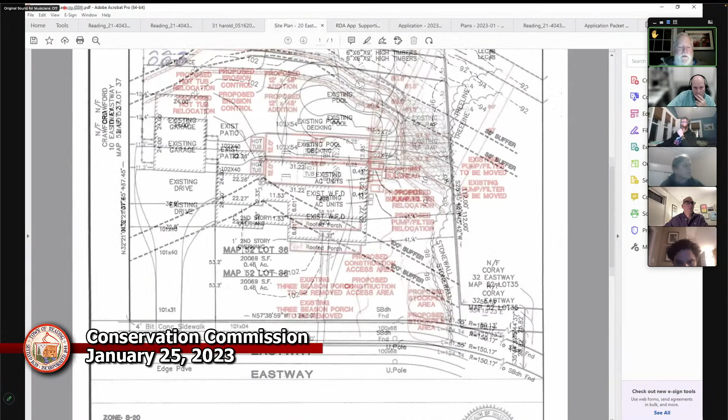One thing I will note is that we did notice there's new boundary stones for the conservation restriction. There were two of them that I can remember seeing that were quite visible. We also noted that there was lots of yard waste, a plastic pot, a dog fence or something like that back there. So from my perspective, before we take questions from the commission, there is a lean. It doesn't look like there's an imminent danger of falling. But at this point, I'll be quiet for a while and let the commission ask questions.

Anybody else on the commission have comments, questions? It was a while ago, so it's been a while since we saw them. Andrew?

Excuse me, yeah, I'll just agree with what Brian said. We visited on January 8th, there's no snow on the ground. I'm just looking at my pictures on my phone. Obviously you can see from the picture there is a significant lean, but these are oaks, so they've been there for a while. Didn't notice anything from where we were. I couldn't stand there and get a good look at the roots to see if there's any signs of uprooting. But the trees looked healthy, and these aren't the type of trees that tend to fall. I mean, these are oak trees, sorry, they don't tend to fall very easily.

So, Mike, if I have a question: how long have you lived in the home, and when do concerns start to raise about fearing these trees might fall because they've been there for a long time? Yes, I'll be living in this property for 3 years, and I believe the previous owner trimmed the trees because you could see on top they were trimmed already. So I don't know if I should go that route, or if it's always good to go through the conservation commission to have a second opinion, because I really don't want any danger to my property. That's my...

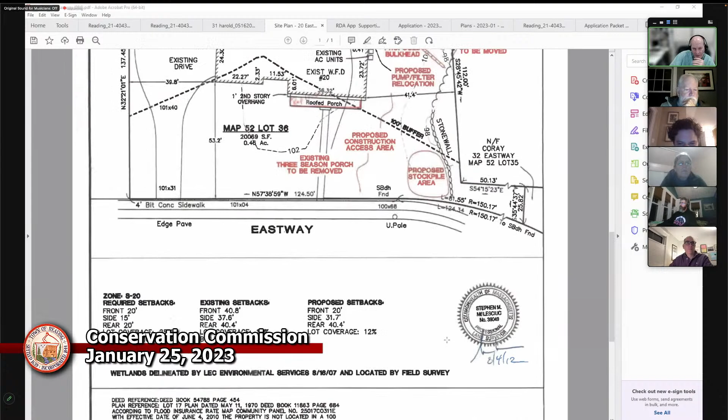And when we were out there, we saw these markers that show the border of the conservation restriction. And that does not seem to show up on this plot plan. Chuck, do you know anything about where the edge of the conservation restriction is? So this is from 2012, this plan. And yeah, so this is the edge of the conservation land right here.

Hopefully you can see my cursor. I mean, right here, the property line. It may go over in this area a little bit, but I don't think it comes down to this other edge. We're having it surveyed at the moment, but my guess is it comes in this way.

If I can jump in, we saw 2 markers in particular. They were along the back straight line edge, but towards the middle or even left of middle. There were 2 clear granite boundary markers with the label of conservation restriction on them. So I was picturing that it was straight out from here that the conservation restriction was.

Well, there's, you're talking about this area over here. And is that where you saw it? Let me get my cursor to where it is. Hold on a second. It looked to us like the conservation markers were pretty much at the fence line and not what it is, 5 or 6 feet back. That was the puzzling part.

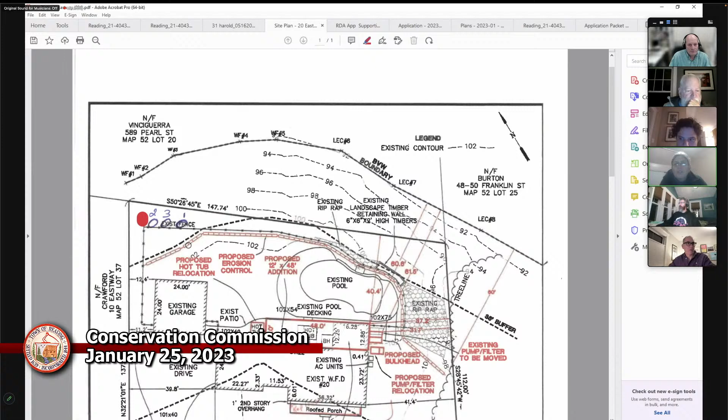Okay. Can we go back to the picture of the trees where we can see them leaning with all their branches over the property?

Yeah, and I also just don't think that the crowns are very heavy, right? Like there's some large canopy trees that are leaning that might have another leader or second leader, right? That's not helping, but I mean they don't look like they're very heavy. You know, I know there's leaves in the trees, but they're long, but they're not very heavy looking to me.

So what does that imply, Carl? That they would be less likely to fall, or that they're not very healthy? When you say they're not very heavy, what does that mean? I think it's just that maybe they're looking for some sunlight. I think they look healthy to me. I think heavy just means that sometimes if it was multi-leader or another big branch coming off or something, that would be weighing it down, but they don't look like that's happening, which is better for the tree.

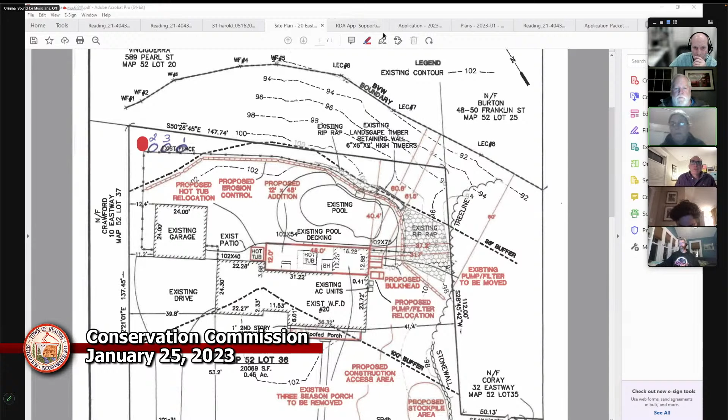Okay, so Mr. Arojo, would you contact the conservation administrator when you are ready to have the trees removed, and also have him and Brian come out to look at the locations of the replacement trees.

And look at the leaf litter and see what needs to be done about the litter and the debris. Okay, we'll do. Okay, we're done with that one.

Ready to move on? The next hearing is 295 Main Street. We are opening the public hearing on a request for determination of applicability filed by Danny Cerqueras Construction LLC under the Massachusetts Wetland Protection Act, MGL Chapter 131, Section 40, and/or the Reading Wetland Protection Bylaw, Section 7.1.

The applicant proposes to replace the existing decking and railings on the 16 exterior decks. The existing decking support framing will remain, and all of the decks will be accessed by using a lift parked on the paved parking lot. Portions of the work are within the buffer zone to a bordering vegetated wetland and riverfront area.

The application and plans can be viewed during regular business hours at the Town Hall Conservation Office and on the Conservation Division page under Current Project, Assessor's Map 12, Lot 44, RCC file number 2023-03.

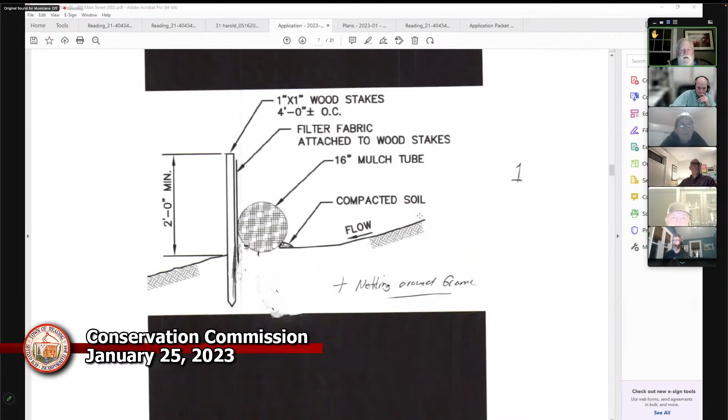I did propose. I'm just noting that we're talking about preventing debris from workers falling, and yet there's this dumpster area to the back right, which is every bit as close. So if you could move that across the parking lot, so it's essentially in the back left, I'd be happier that it's that much further away from Walkers Brook.

Yeah, that shouldn't be an issue. Let me see... oh yeah, right here.

Okay, Brian, just hold on a second. Kate, are you talking about an existing dumpster that gets trash from the building residents? Yes. Actually, the person we're talking to is not the building owner, it's the construction person for this project. Well, that explains that. Okay, I was a little confused there.

Okay, with that, Martha, back to you. Yeah, I just have a question about how you get the planking and the railings from the 4th floor and the 3rd floor down to the ground when you're doing this project.

We'll bring it all down in the lift. So the decking that's there now, they're 8-foot pieces. We'll basically cut them in halves with the Skil saw, and then just put them in the lift and bring them down as much as we can at a time.

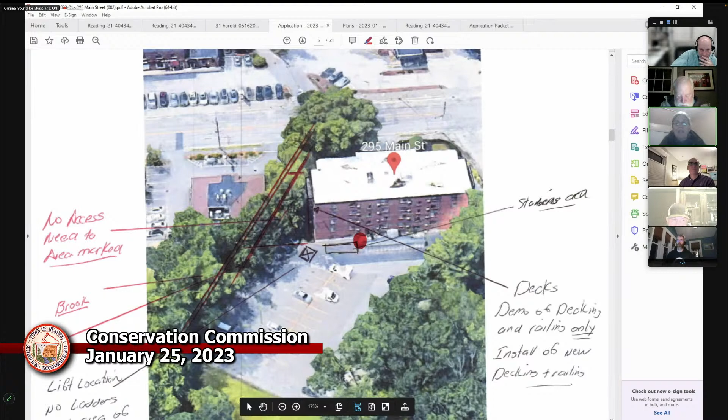And are there any people in the general public who are here at this hearing who would like to have input on this today? If so, please use the reaction button and raise your hand. Okay, I don't see any general public. Is there any further discussion needed on this proposal?

Not seeing any, can I have a motion? This is again an RDA, so we want to close the hearing and then we're looking for a negative determination if they're going to do this project.

This is Andy, I'll make a motion to close the public hearing for 295 Main Street. This is Brian, second, I'll second that. Okay, that was seconded by Brian. Let's vote: Brian Bowe in favor, Carl Sacconi in favor, John Sullivan in favor, Andrew Driven in favor, Martha Moore in favor.

Okay, can we have a motion? I saw Brian. Chuck's finger go up, did you want to comment, Chuck? I didn't hear you, Andy, what did you say? I saw Chuck, you wanted to say something earlier. Did you want to add something before we continue?

So I just want to make sure that you're not approving the wetland delineation. So just add in, positive 2B.

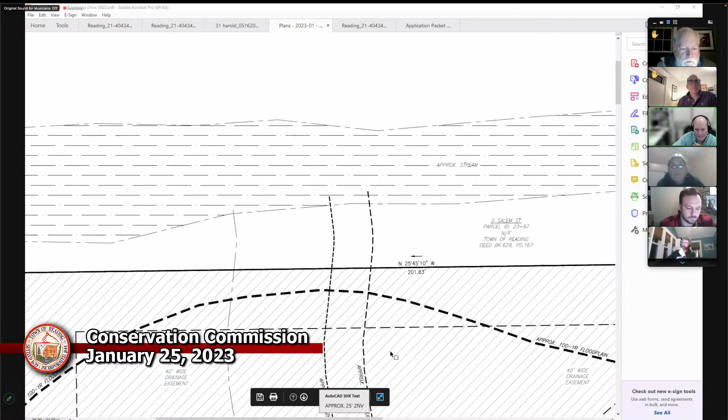So existing 7.5%, proposed 7.7%. Okay, which is considerably under the maximum of 25%.

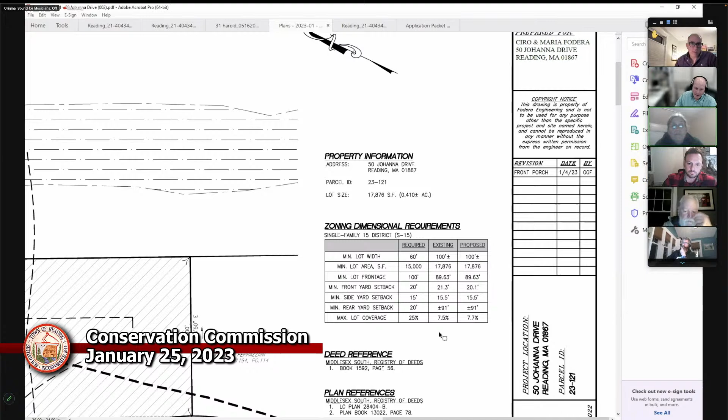Right, but that's kind of like an allowance for zoning, where we would be interested in the 10% within the first 100 feet of the riverfront. Okay, and it's still under, so 10—that's what, Andy, I didn't want to take your thunder, sorry. I just wanted to show all that, kind of knowing that you were going to be talking next.

Okay, Andrew. I think Brian has his hand—oh, did you take your hand down, Brian? Yeah, the next thing I was going to talk about was the square footage, so Chuck beat me to it.

Yeah, I didn't really need to see much more in my quick analysis. It looked like it would be a positive determination, I didn't need to spend much more time than my quick drive-by. I think we are owed a little bit more information about what's happening and how we're going to prevent the debris from going into the river, and then just addressing these larger concerns—does it meet the riverfront standards and all that jazz?

So the riverfront standards do allow alteration of up to 5,000 square feet on a parcel, and this is well under that for sure. No, the riverfront standards for redevelopment allow up to 10% of the site. So you have about 1,800 square feet, which is 10%. It's 10% or 5,000 square feet, whichever is larger.

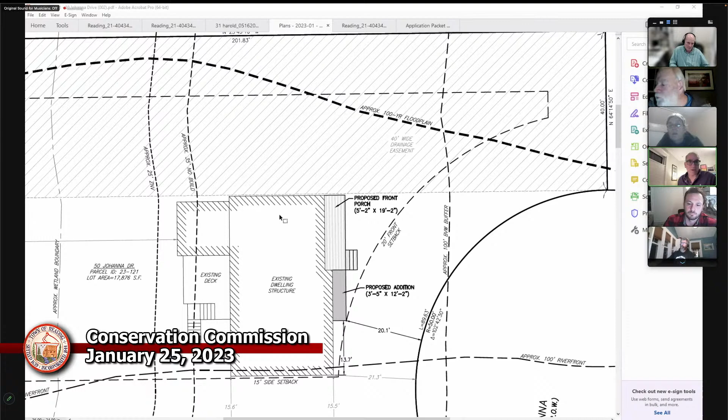And it's up to other folks on the commission. From my point of view, it seems like a positive determination. It would just be a notice of intent, but I know that's a bunch of paperwork and other things. I'm not saying no to the project, I just think you should go through that process, but I can pick it up where you left off, or you can do it, Andy. I think it's important to understand that this is a riverfront.

The existing impervious area has to be calculated into that 10%, or 5,000 square feet. So I was wondering, what is the total amount of existing impervious square footage? Giovanni, do you have that? I can run that calculation real quick.

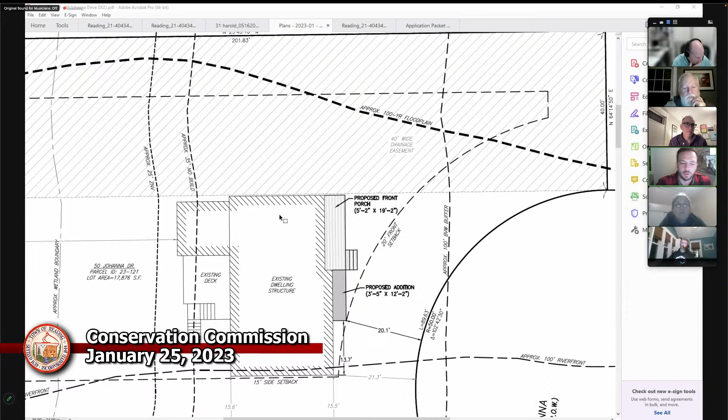I think we were at 7.5% of the property. The property is 17,876 times 0.075 — this is without the addition — so it's approximately 1,300, call it 1,340. And then adding 42 square feet for the addition, we're still very well under the 5,000 square foot mark.

And it looked like the driveway to the right of the building is not paved — is that correct? Just to make sure we stay on topic, sorry Martha, but the 5,000 square feet, which is what Andy was trying to say, does not exist in the redevelopment standard. You have to meet the 10%. You don't get that alteration.

I believe that's what he's saying, and I'm looking at the regulations now to make sure that's correct. So anything over 10% — with this project and this addition, if you're over 10% of the riverfront, you need to mitigate or restore to move forward. That's why we were interested in the numbers and whether you met that standard or not. That's right, but if he's saying 1,400 square feet, he's still under the 10%. So, okay.

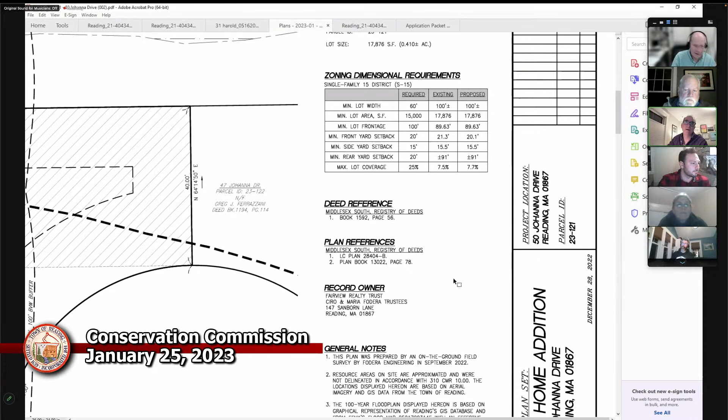Can I ask why this was submitted as an RDA and not an NOI? Because it's determined — it's a 42 square foot addition on an existing house, on top of existing lawn, already lawn. I think it's appropriate.

I do think that you could ask for, if the numbers don't work out, some mitigation or restoration. And if the numbers work out, then it can be approved. I don't agree that we have to have a notice of intent to do that, but you guys can make your own decision. So Giovanni, did you get an answer on the driveway?

I'm getting approximate values right now. It looks like the driveway is approximately 1,200 square feet, using online area maps. So the driveway is about 1,200 square feet on top of the 1,400-ish for the house itself. So then if I'm looking at that right, that puts you over the 10%, does it not?

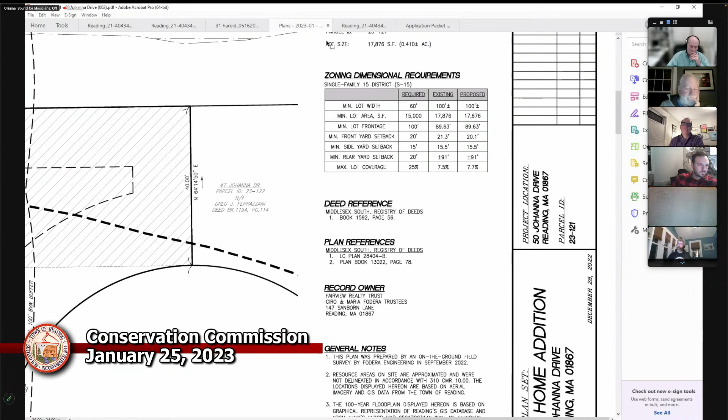We have to make the driveway impervious. Is there anybody who's been trying to talk who is one of the homeowners? Yes, my name is Ciro Fodera. And what Giovanni said, you have what, 1,200 square feet on the driveway? How did you come up with that?

So it may be well under 1,200 square feet. Using the GIS markup tools, measure polygon, I came out with 868. Probably conservative, but I don't think it's good enough. And I actually went out into the cul-de-sac area where I probably shouldn't have. Could do it again quickly.

So I'm going to suggest there's a lot of questions here, and we may want to continue this hearing and have the applicant come back with actual numbers after having a chance to look over the regulations and understand them better. But are there other questions members of the commission have that we could propose tonight, so that when the applicant comes back next week they'd also have answers to those?

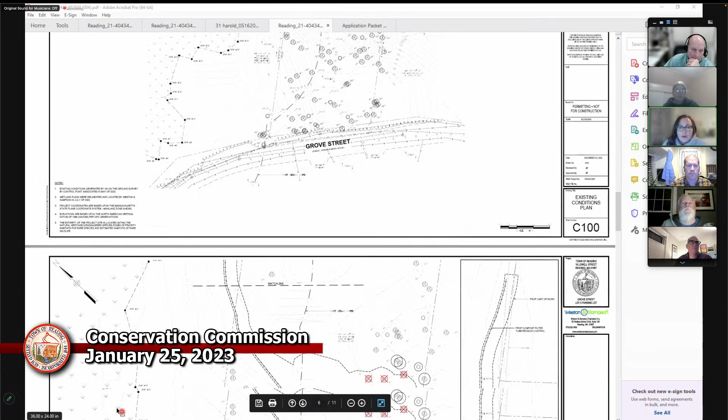So the proposed work will include the construction of a gravel parking lot with 17 parking spaces, including 2 handicap accessible spaces. There are 2 portable toilets proposed just north of the handicap spaces. As Chairwoman Moore mentioned, 25 trees are proposed to be cut down to accommodate this parking lot. 24 of the 25 trees are not located within the buffer zone. You can see on this plan the 100-foot buffer zone just clips the limit of work in the northwestern corner there. The site will be regraded to accommodate this parking lot, as shown on the project plans. A guardrail will be installed along Grove Street to limit any cars from parking along the street and encourage folks to use the parking lot in this area. It extends pretty far in either direction to discourage the use of parking on the street. So during construction, compost filter tubes will be installed between the proposed work area and the nearby bordering vegetated wetland. In addition, a stabilized construction entrance will be installed to prevent any sediment and other material from being tracked out onto the roadway during construction.

So the parking lot has been designed to have very minimal impact to resource areas. It only clips the 100-foot buffer zone, and it's a walking path, as you can see on this plan right here. All disturbed areas outside of the parking lot, but within the limit of work, will be restored with loam and seed after construction. The entire site is located within natural heritage priority habitat of rare species and estimated habitat of rare wildlife. We submitted a MESA checklist to Natural Heritage and received a letter today. Chuck, I believe you have a copy of that as well. They proposed a no-take action, but with a few conditions that the project will need to meet. So I will turn it back over to the commission and answer any questions you may have.

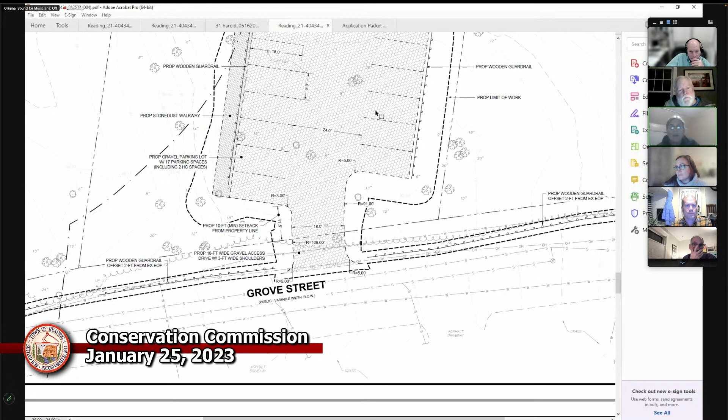And I'm a little concerned about the cut into the hill at the back end. The topo lines for the proposed grades seem to be quite steep. Are they meeting the minimum or maximum slope requirements for grade? So we have a 3-to-1 requirement, and if you exceed that, you just have to propose stabilization material, and the commission has to approve it. So we just have to know that's what the regulations are asking.

Can you show us the picture which has those topo lines on it? Sure. So I believe we're proposing 2-to-1 grading, but we have a note stating it will be stabilized with erosion control blanket. Okay, yep, right there, if you just move—yeah. So you're going to staple that into the slope, and then is it seeded? That's correct. Yep, everything outside of the parking lot, but within the limit of work, will be loamed and seeded.

Did you call out your seed mix?

Does it make sense to have a seed mix? Are we talking about grass in this area, or the edge of the forest? Yeah, we left it generic. Usually the way we handle that with these projects is when they get into construction, we have a set of specifications that gets into the nitty-gritty of the seed mix. We have different ones we select from depending on the objective, so we'd select a mix proper for stabilizing a slope of this nature.

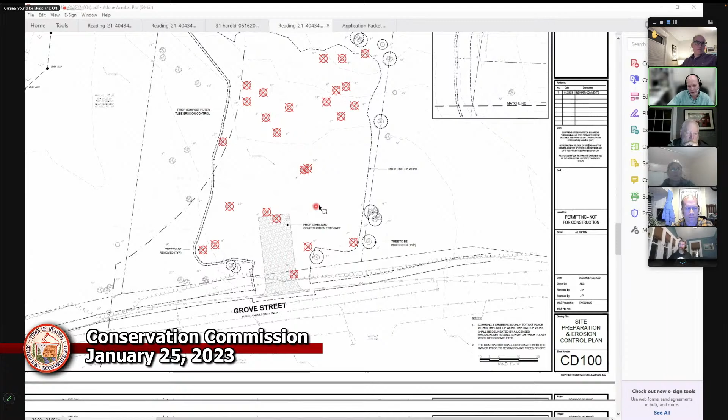The other thing I wanted to mention is that there is one tree being removed in this area, and I think for this tree you would meet our tree policy. The commission can talk about that, but they can have the replacement anywhere they want—it can be within the buffer zone, which is desired, but it could also be along the bank here. I think planting in this area is reasonable, and if we brought it to the town manager and made a request, that likely would be well received, even though it's outside the conservation's jurisdiction. So that's all I wanted to say.

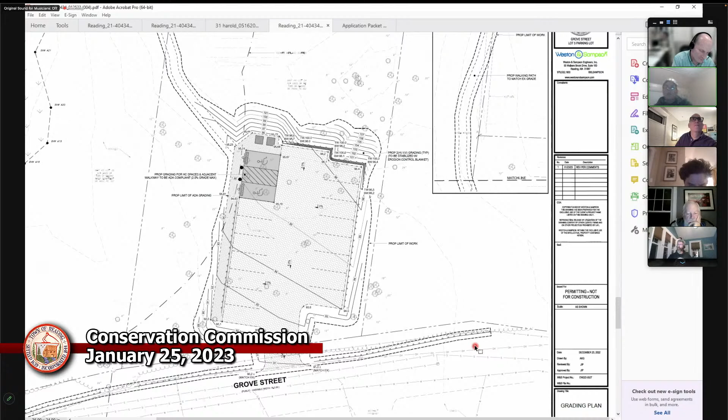Chuck, can you show the part of the plans that show what the guardrail looks like? Well, this is the guardrail. Oh yeah, sorry, but there's an image of what the guardrail would be built like. Here we go, I think I just need to move this over. This is proposed as a wooden guardrail.

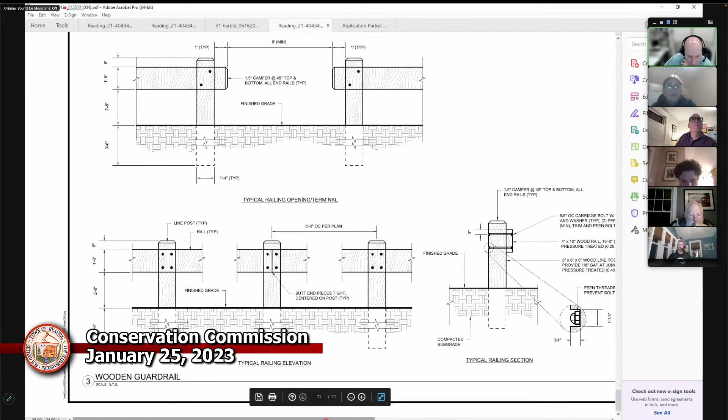Let's see what it says here. 4x10, kind of like railing going across the post. The posts are 8x8s. Is that what you said, James? Yeah, 8x8 posts, 8x8x6. Everything's bolted together. Yeah, it's a pretty substantial but wood guardrail.

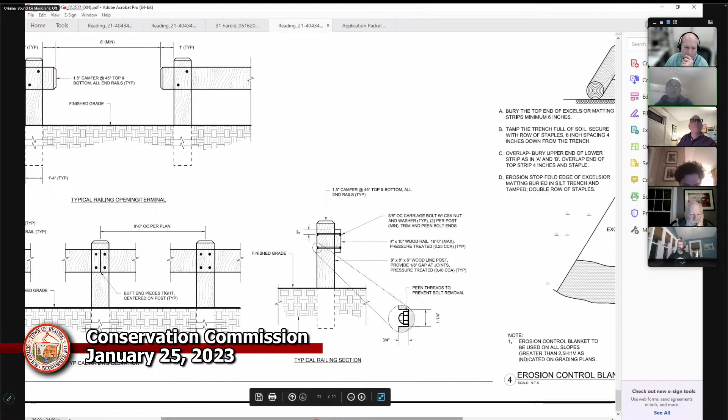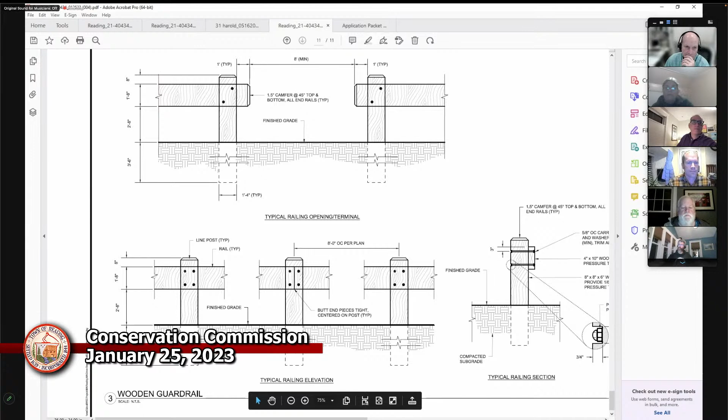I think we saw plans at the previous meeting of what the house construction on lot 4 would look like and where it would be located, when we were voting about the conservation restriction. So that might be available on the conservation website for Mr. Freeman if he wanted to look at where that house is proposed to be built. Thank you, I will check that out. It's also probably on YouTube.

Okay, any other questions or comments on this project?

All right, so where do we want to go from here? Let's work towards wrapping this one up. I think one thing we heard was we want to do something about the tree that's being cut down that's within the 100-foot buffer zone, and possibly putting shrubs on the hillside to mitigate for that loss of that tree.

Are there any other conditions we would want included in a negative determination for this project? So in lieu of the tree, you would ask for a tree or two shrubs, proposing to put them on the hillside just in back of the parking lot. And from what I gathered, you're going to make a request through me to the town manager for some additional plantings of shrubs. I was wondering what you're looking for—would you just like to receive a proposal, or just know that the request went there?

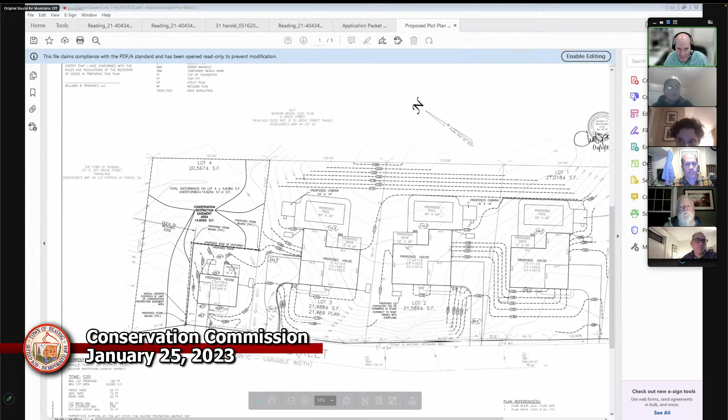I would say that that guardrail looks pretty accurate for that length. I didn't see it taking a corner, so I think we should be okay—protecting the conservation restriction with a guardrail and not going across in front of the driveway. Right, maybe that's what is being proposed.

Okay, thank you. All right, can we close this hearing? This is Brian, I make a motion to close the hearing on lot 5 Grove Street. Second. Brian Bowe in favor. Carl Ciccone in favor. John Sullivan in favor. Andrew Gibbon in favor. Martha Moore in favor.

Can we talk about conditions now, just before you make the issue? Some of the conditions you may want on the site, we already have. If we're talking about shrubs, they're going to be 5-gallon pots. We talked about the guardrail, and we're going to require 1 tree or 2 shrubs at the back of the parking area. And we're going to make a request for an additional amount that I'm going to have to create with Carl Ciccone and Martha Moore to present to the town manager.

Okay, so they can see the plan. Any other conditions on top of that? I would add, make sure the street's swept each day at the end of the job—I know we have a construction entrance. It's only a small part in the 100-foot buffer zone. I would imagine no stockpiling would be done in that area; there wouldn't be any need for it. And the guardrail will not be installed until the parking lot is complete and operational.

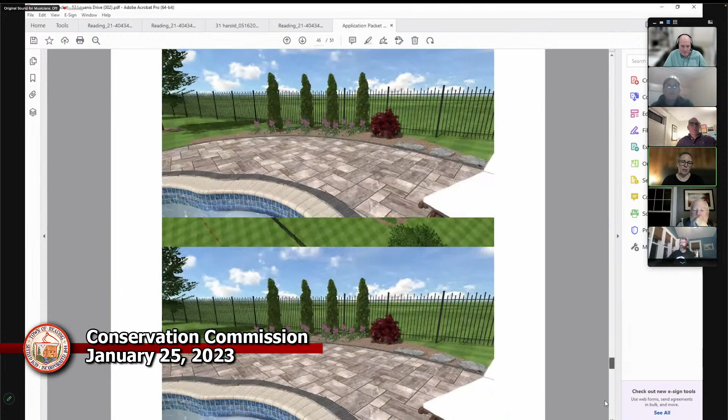Kristen Farr with Hancock Associates, I'm a wetland scientist on the team there. With me tonight is Jason Morey of Brookwood Landscape and Stonework to answer any questions about construction methods and things. But as you stated, Martha, this is a buffer zone project. It's an existing single family house where they want to install an in-ground pool, patio, replace the deck, expand the deck a little bit, have a pool house and putting green, and a safety fence around the property.

So there's no special areas, no natural heritage, no outstanding resource waters, ACECs or anything especially sensitive here. It is a buffer zone project, and under your bylaw we are not touching the 25-foot zone of natural vegetation, nor are we going into the 35-foot no-build zone. We are proposing erosion controls around the site. Any excavated soils would be trucked off-site, so there would be no need to stockpile. Some minor grading is proposed around the pool area, but overall it's a pretty flat site.

I know you guys did a site visit. I couldn't make that the other day in the blizzard, but I hope you could see what you needed to see in order to make a decision. But I am here if there are any other questions. So that's the short presentation.

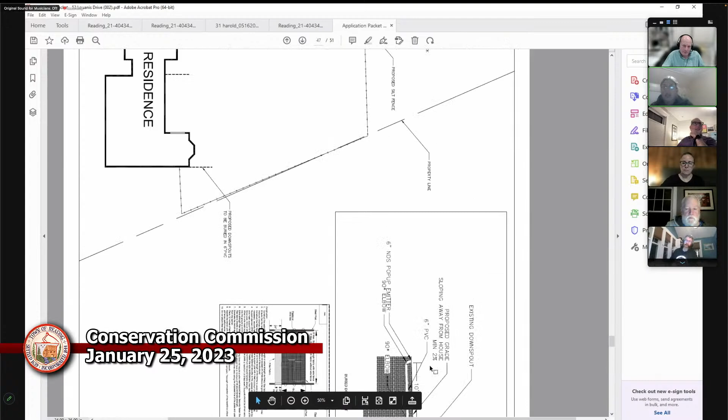Okay, I'm just, as people talk, I'm going to run through the pictures. And I believe there was only one commission member who was able to make the site visit, and Chuck, so maybe you guys could tell us what you were able to determine in the snowstorm?

Yeah, I can give a quick rundown. The lawn was kind of all covered in snow, so we couldn't tell a lot about what was there, other than that the vegetation changed as you get towards the back of the yard, which you can see on some of these pictures. It kind of turns into woods. There's some Phragmites patch back there, but otherwise it should be lawn all the way back until you get to the wooded area. Chuck took a couple of soil samples with the old auger. It was pretty rocky soil, had trouble getting down too far into it, and I don't think there's anything in the soil that suggested the wetland extends farther into the yard than where it's currently marked. We found there were 4 flags, we found them all, and they all seemed reasonable from what we could see while we were out there.

Thank you, John. All right, Chuck, do you have anything else to add to this? No, I agree with the wetland flags, I think they were well placed, I wouldn't move any of them. Have to say we did this in a snowstorm, but they did look good, snow and all. Okay, any members of the commission with questions or comments?

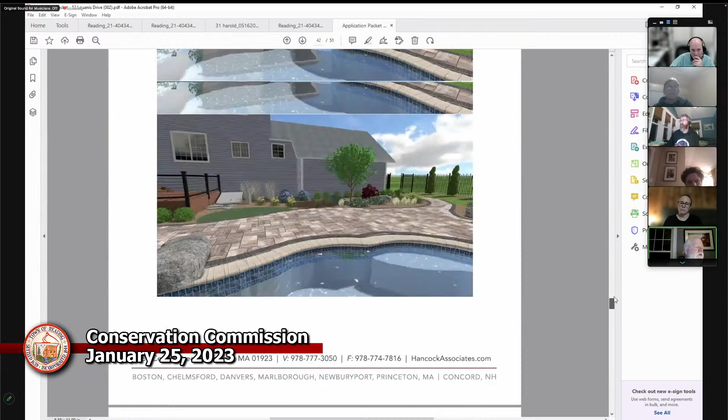Brian asks: So you said that any material will be trucked off-site. Is that every day? Will any be left for any period of time? Jason, is that something you would be able to answer - like how long the pool would take to excavate and how often material would be trucked off?

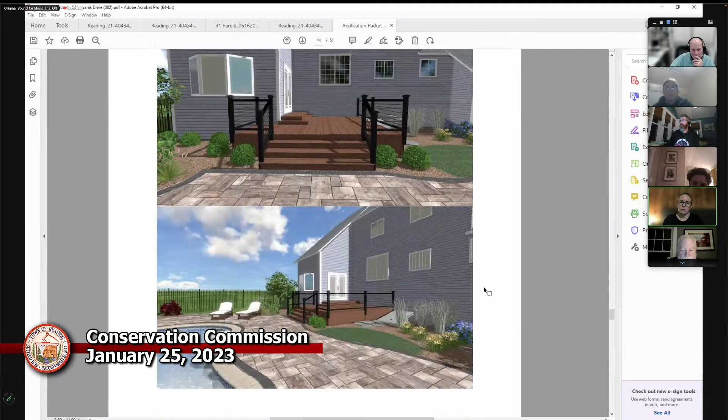Jason, are you still there? I'm here. Can you hear me now? Yes. Good evening everyone, thanks for your time. I'm Jason from Brookwood Landscaping. Typically, projects of this scale would take anywhere from 4 to 6 weeks from start to finish.

In terms of stockpiling material, most of the topsoil and organic matter will get taken out and probably removed right off the site completely. As material is brought in, it's usually structural in nature, so what comes in will eventually stay in place. We generally don't use any of the existing substrate or subsoils as backfill to the pools. This is a fiberglass pool shell, and it's really important that we use processed material, like 1/2 inch or 3/8 crushed stone, clean against the pool shell. So the organic material will come out, and there's no reason for it to stay on site.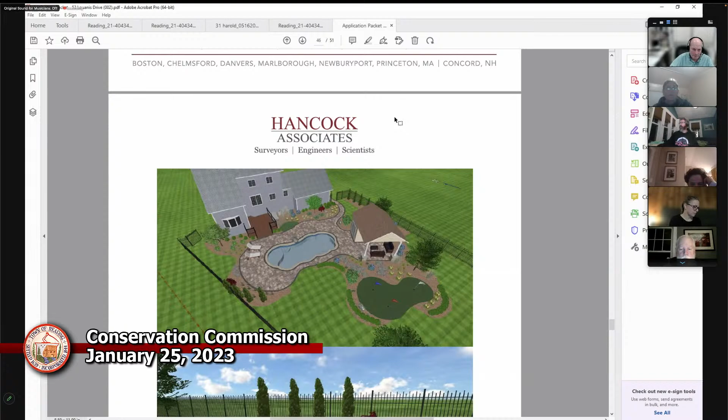I think it would probably just be in our way anyhow. It's kind of tight to access down the property line, I believe on the east side, between the two.

So Jason, if I can interrupt, you said 'probably' a couple of times in your answer - so will it be taken off right away, or will it not? Yes, it'll be taken off right away. Okay, so you won't have anything to worry about eroding even overnight or for a day?

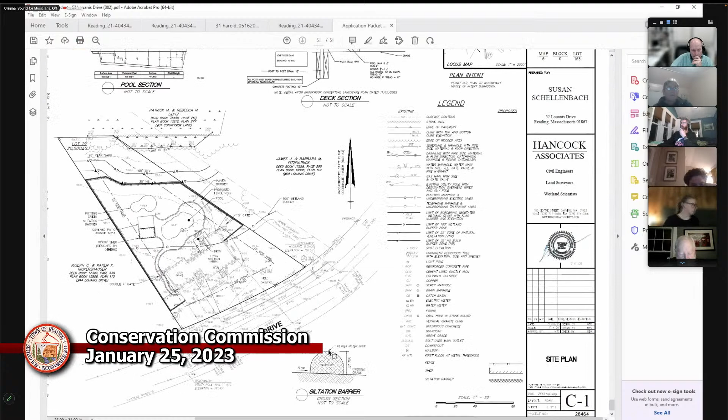Well, we can try not to. If it needs to be a condition, then we're happy to adhere to that. But typically it's a tight site, and it's not really in our best interest to leave anything in our way. So in terms of construction and building, it would make the most sense to get the material off-site.

Okay, so we can just put a condition on for that. So as far as the material you're bringing in, this clean fill - it's usually processed material like 3/4 stone, dense grade material, processed gravel, that kind of stuff.

Okay, and will that come in and be stored anywhere before it's actually put in the ground, or can it be brought in, put in the ground, and then? It's usually put in place and then spread and compacted - that's usually how it goes. Okay.

Now, who's going to - actually, so is it you folks who'll be doing the construction? Yeah. Okay, so you'll be aware of other conditions and what have you. Correct. Okay, that's all I have, Martha.

Okay, when you said which side the construction entrance is, can you tell us now that we've got the plan in front of us? It's along the drive side, so we would be coming in to the left of the garage. Okay, where the little path is shown, is that going to end up - so that's the west side? Correct. Okay, my apologies, it's the west side.

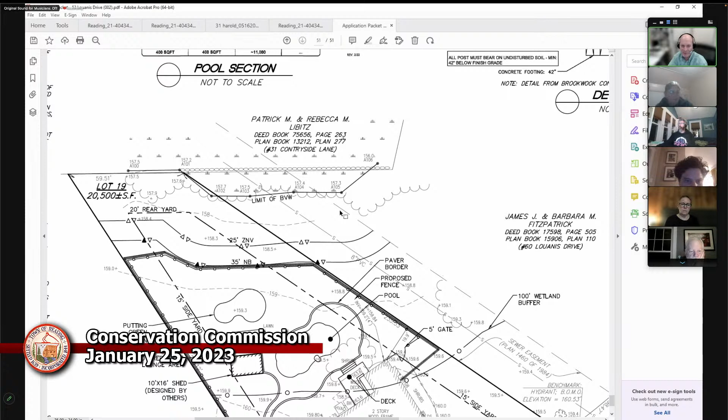Applicator's license. And then, here it says planting beyond the fence. This came up during the site visit along with the Phragmite removal and also along with the infill, that we were wondering about a vegetated buffer strip. I think we got back from Jason, he was happy to add some trees and evergreens and hemlocks in different areas. But I saw immediately that's not exactly the spot where DEP and conservation is looking at. So where we look at, if the screen's available to everyone, is this 25-foot zone of natural vegetation, between the flags and the grass, to establish a buffer strip within that 25 feet. This was also an unsolicited comment by DEP. So I think that's something the commission should discuss, all three of us, and come to a determination, is this something you want, or are you fine to move on without it?

Yeah, hi, this is Bob Schellenbach. We'll definitely do that, take care of that in the buffer zone.

Okay, typically we review a planting plan just to make sure that it's native plants, spaced correctly, and within the zone that we want. But that can happen either before we approve or as part of the ongoing process.

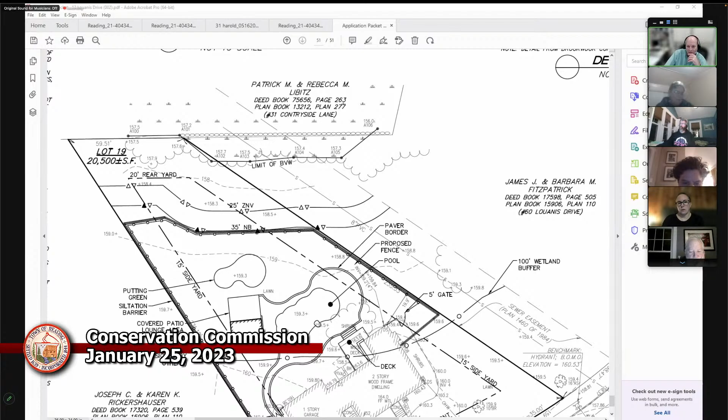I think Jason and I could work together to come up with some appropriate plantings for that area to fill it in, and give some kind of invasives removal plan as well. I think that's what that area would need to have the best survivability.

So that's great, a licensed applicator, Mayer Tree has one. I'm sure they actually work for the town in a kind of capacity to remove trees, and they sometimes spray herbicides. I've only seen it a couple times, but I think they do have the licensed applicator.

Does anyone want to take that up? Brian, Carl, John, Martha, Andrew?

I do like the idea of adding native plants in the zone of natural vegetation, that 25-foot zone. When I was going over the plans, it looked to me like a lot of the plantings proposed are not native plantings in the area around the putting green and the swimming pool. I'm curious why particular choices like threadleaf Japanese maple were picked out as appropriate plants for that area.

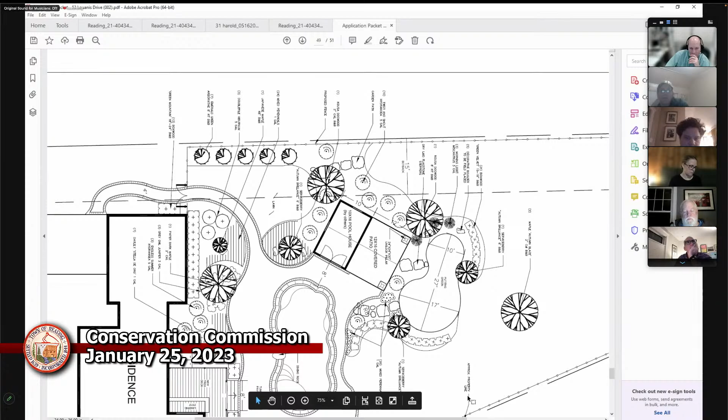I can answer you. Just for visual acuity, this is a formal area where they're going to be dining, potentially under the canopy, and a dwarf plant in that area was more of a focal point. So most of the plants around the landscape are ornamental in nature, for visual, fragrant plantings and that sort of thing.

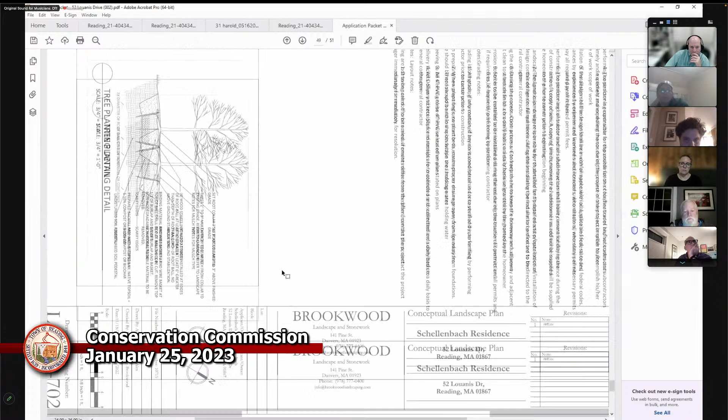Ease of maintenance is another reason. We don't want anything that's going to grow too big and leave lots of debris in the pool or on the putting green itself. So we're trying to keep the plants sporadic, if you will, definitely trying to cover some square footage in terms of garden bed and planting space. But the plants themselves are more on the ornamental side, for ease of management and maintenance.

I haven't had a chance to look at invasives versus natives versus ornamentals in great detail, but my sense is that boxwood may not be a desirable plant to be planting. Carl, you have more expertise in that area. Do you have a comment on whether boxwood is appropriate?

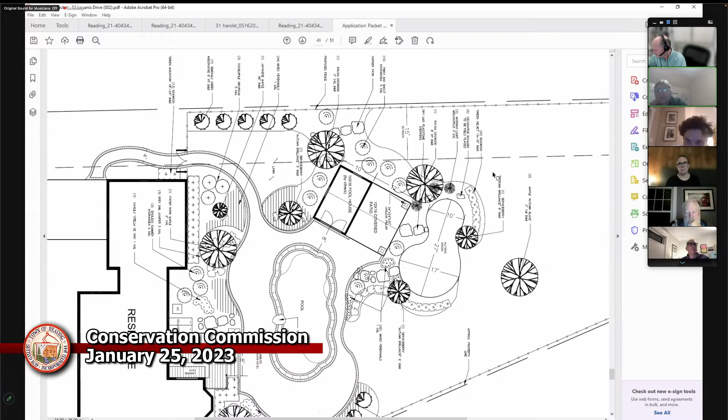Just from an aesthetic standpoint, is that what you're asking, Martha? Or, more like, is it risky to become invasive? I know, like, if it was burning bush, I'd say don't plant burning bush. I don't remember boxwood being on that invasive end of the spectrum. I don't believe that. I think in our world they're just susceptible to dying off in that sense, but not from an invasive point.

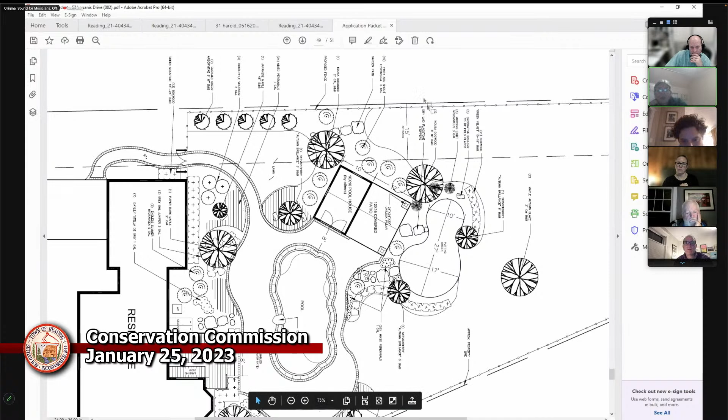All right, good. Okay, so I guess my concern in the zone of natural vegetation is that we would definitely be looking for native plantings and not ornamental plantings.

Can I just chime in on that? I did respond to Chuck. I apologize if I didn't get a chance to clarify, but I did make some suggestions of red maple, some gray dogwood, some bayberry, some low blueberry, and viburnum along that buffer. So I don't really have an idea of what depth you're all seeking. Is it 25 feet by 70 feet? Is it 10 feet by 30 feet in terms of square footage and space? But I'm sure we can come up with something suitable. If you're willing to put that in the conditions and give us some guide rails to stay within in terms of the scope of your buffer, we can accommodate that.

It looks like it's about 80 by, I don't know, 30, Jason, just FYI. Okay.

I would comment, Martha, on the 80 by 30, because I did read in the email Chuck forwarded us about the gray dogwood and the maple, and I think with an area that large, it doesn't all have to be planted square-foot wise, but canopy wise, I think that's the right approach. Some larger canopy trees, right? Maybe get some oaks in there, maple, right Martha? This is an open area where we can get something of some size, which would be nice.

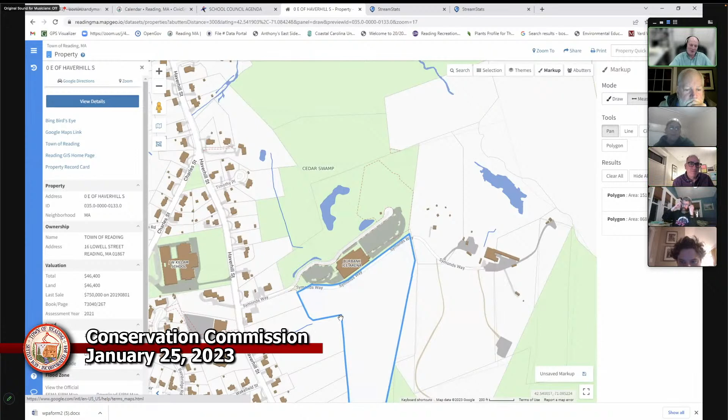So that's what the survey was coming into play. Yeah, so this is the area you're talking about here. Yes, and there was also talk on the north of the roadway, noticing some of that green area, like what can we use any of that? That already has some soccer and baseball fields, but even the area between the little pond and that little stream, like can we build over there? But I think it's loaded with vernal pools and wetlands. So it sounds like there was some scope creep going on.

Yes, definitely. But focusing on what we want to do there, I'd like to see, personally I think it's good for a building of sports, like in Winchester they have an indoor soccer area. I went to a Boston sports complex in Wellesley, which is pretty nice. I think it would be nice to have some sort of indoor sports complex, but that's what I thought I read, because of the constraints of this site here.

And the location of this parking lot area - look, there's like 4 cars in it. That could be a field, this could be parking. I could be wrong, maybe I was just... I'm not saying that's a great idea, I'm just saying that's what I thought I read.

Obviously this is the skeet shooting field, they're not shooting in this direction. Right. Yeah, it's interesting.

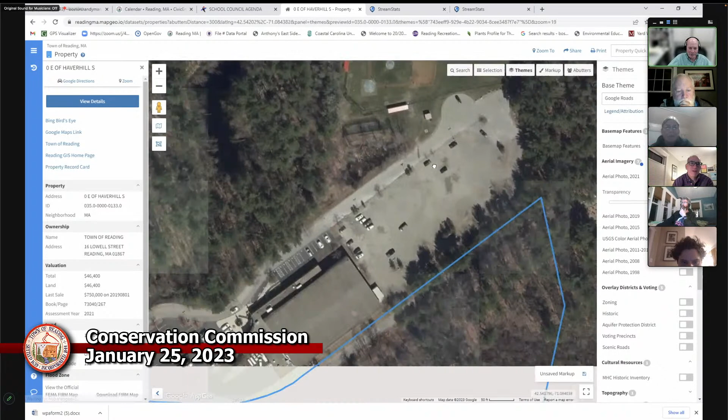I guess for parking you would want to push for stormwater for sure, meet the stormwater standards for the parking lot if that's what they wanted to propose. And of course the lighting would be another issue we would want to address. But there was nothing actually put on the table of any real proposal at this point. Yeah, it sounds exciting.

I know you're working with Carlo Bacci. Yeah, Carlo's on that committee and he's the chair. Chuck Robinson is the vice chair, so when I say Chuck I'm always referring to you, but they always think I'm talking about the other Chuck. Is Chuck Robinson a wetland guy? No, he's the vice chair of the SWEC committee. Chuck Robinson is a baseball guy through and through.

That's another thing I thought was interesting, that Carlo and someone from the school and someone on the recreation department - so there's already 3 votes for a field. I think Carlo mentioned it many times, according to the paper, that's probably what he thought was a good idea. My understanding too is that there's a lot of push for ball fields, because there's always issues with playing space in Reading between softball, baseball, whatever. So my understanding from my spies was very much a push towards playing fields.